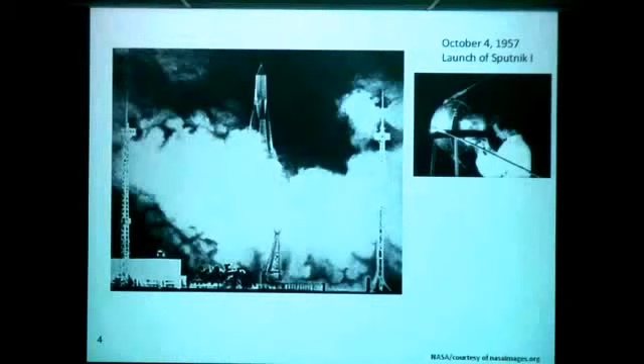Now, on November 3rd, 1957, the Soviets further rubbed our noses in it by launching Sputnik 2, carrying a dog named Laika, who died in space. Of course, animal rights advocates around the world were outraged, so nothing has changed on that score either.

In any event, it was time for an American reply. And on December 6, 1957, Vanguard TV-3 rose 4 feet into the air before falling back on the launch pad and exploding. This was America's answer to the Sputniks.

It was carrying a 3-pound satellite compared to the 184-pound Sputnik 1 and 1,120-pound Sputnik 2. The reason for the vast discrepancy in weight was that Soviet nuclear warheads were significantly heavier than their more advanced American counterparts, so the Soviets needed to build more powerful boosters than the Americans to deliver the warheads.

A few days after the Vanguard failure, the Soviet delegate to the United Nations asked whether the United States was interested in receiving aid earmarked for underdeveloped countries.

Not surprisingly, von Braun soon was given explicit orders to launch his satellite as quickly as possible. Medaris agreed with William Pickering of the Jet Propulsion Laboratory that JPL, rather than von Braun's team, should do the satellite work.

Now here's the successful launch of Explorer I. On January 31st, 1958, Explorer I was successfully launched atop a Jupiter C rocket.

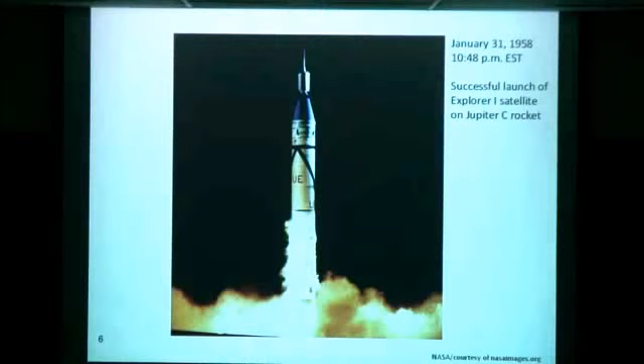All right, now here's what it looks like. This is the satellite. It's a little bit taller than I am. I'm 6'6", and this is almost 6'9", but it only weighed a little under 31 pounds.

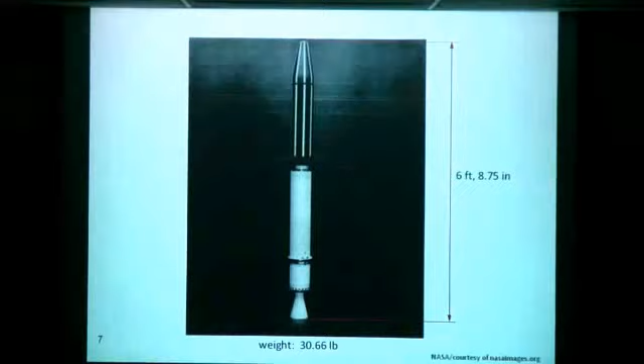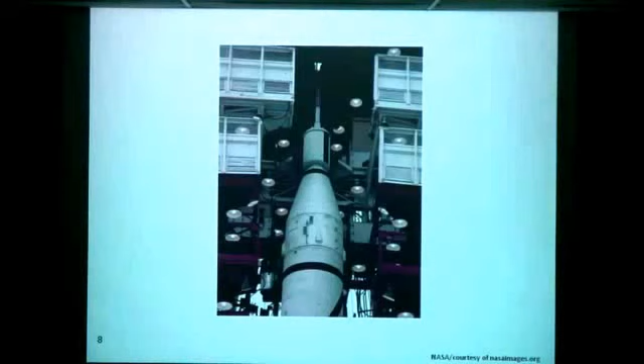It was mounted on a drum on top of the booster. Here's the Jupiter C, and it was mounted on this drum, which was spun up on the launch pad. So here's that satellite you saw, and this drum was spun, and it looked like this on the launch pad.

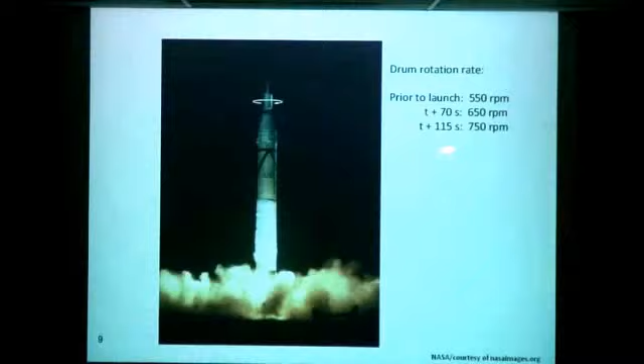Prior to launch, they spun the drum up at 550 RPM. At 70 seconds after liftoff, they increased the rotation rate to 650 RPM, and at 115 seconds after launch, up to 750 RPM.

So here's what it looks like. It came off the booster horizontally, and a little bit later, it was doing that.

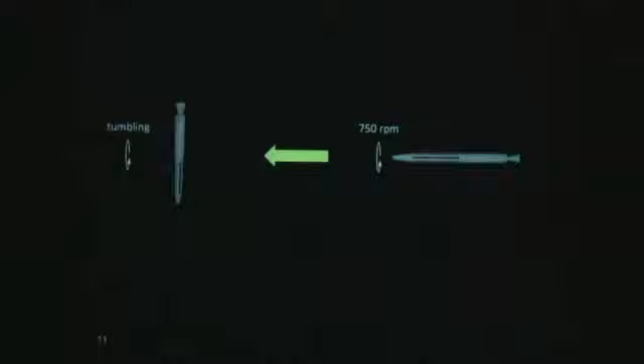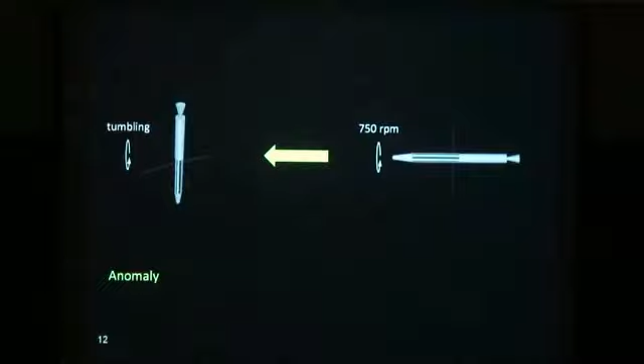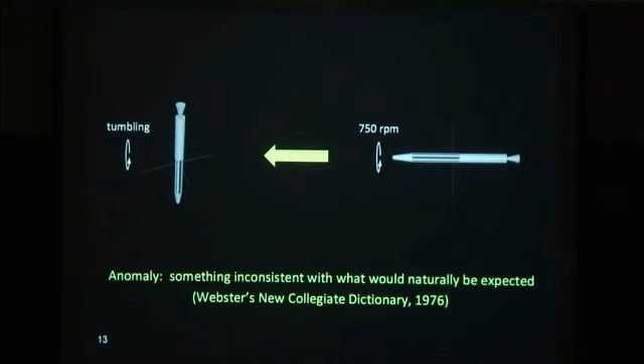Now, this was regarded as an anomaly. In order to ask why it was regarded as an anomaly, you have to know what an anomaly is: something inconsistent with what would naturally be expected. So the question is, why would something else be expected? We'll get into that, but this is what was going on in the engineering world, and I will come back to this in a minute. What was going on in the scientific world is something else.

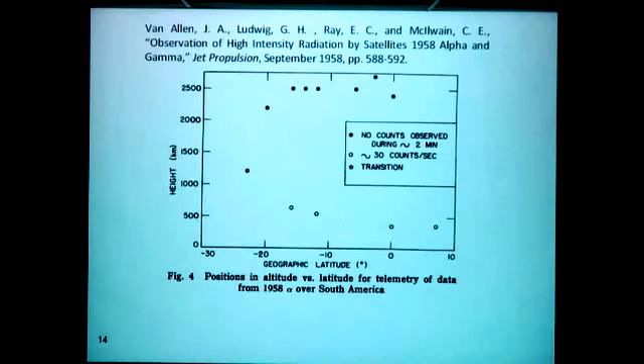So what was going on here? We found a spot in space where there's absolutely no radiation at all. Now, that was impossible—there's radiation everywhere in space.

What they discovered later, after looking at the data, was that the extremely low output rate is caused by very intense radiation, which jams the Geiger tube so that it puts out pulses of such low height that they are below the threshold of the counting circuits. Laboratory tests showed that this first happens for the present equipment when the radiation reaches an intensity that the counter would produce 35,000 counts per second.

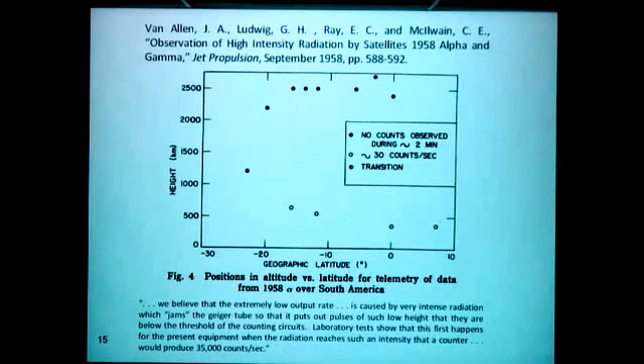So in the laboratory, they showed that not only were there no counts here, but there was 1,000 times as much radiation as here. And so this is the discovery of the Van Allen radiation belt. The historical fact is that the equipment read that there was no radiation whatsoever, and that's what gave them the data that let them realize this was actually a radiation belt, not a radiation hole.

So here's a picture of the mission that was declared a success because it succeeded in two things: it made it into orbit, and it discovered the Van Allen radiation belt. Scientifically, it was a complete success.

Now, this is William Pickering, who is head of the Jet Propulsion Laboratory. And here's James Van Allen, who is a physics professor at the University of Iowa, who designed the radiation detector, after whom the Van Allen belts are named. And this is Wernher von Braun, who is Wernher von Braun.

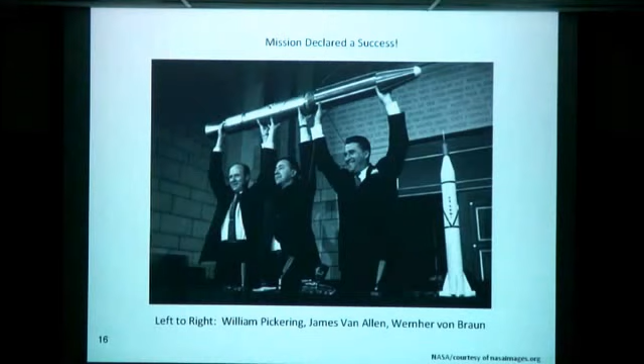Now, back in the engineering world, that's the science world. Let's get back to the engineering world. We still don't know what caused this anomaly.

There's this big question. Now, to answer this question, we need to go back 200 years to Leonhard Euler, who is the father of rigid body dynamics. Some of you have heard the name Euler, but I'm going to give you some background on him. Leonhard Euler is considered to be one of the 4 greatest mathematicians in history, the other 3 being Archimedes, Newton, and Gauss.

Euler lived to be 76 years old and created enough mathematics to fill 74 large volumes consisting of 866 items, including papers, books, elementary textbooks, books for the non-scientist, and technical manuals. And this does not include the projected 15 volumes of correspondence and notebooks that are still being compiled after more than 200 years.

Euler published more pages of mathematics than any other mathematician, and he possessed a trait that is rare among most mathematicians: he wrote clearly so that his work was understandable, which added greatly to his fame, because all of that stuff he published, people could absorb.

Euler made contributions to calculus, analysis, number theory, complex analysis, calculus of variations, differential equations, probability theory, topology, optics, electricity and magnetism, hydrodynamics, astronomy, and mechanics.

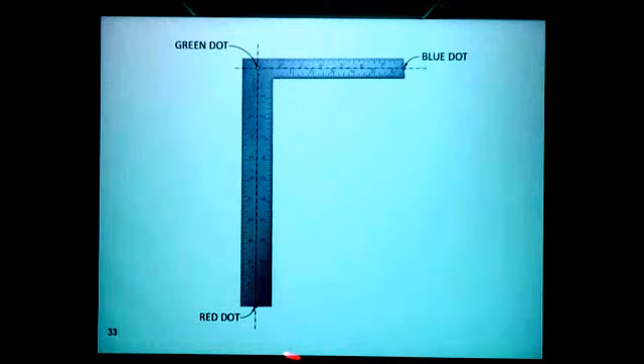If you draw lines down the middle of these two legs, there's a red dot here, a green dot here, and a blue dot here. And this is all taking place in a vertical plane where this resides.

What I want to do is launch this in the plane at an angle of 20 degrees to the horizontal, make this point start off at 20 feet per second, and give it an angular speed of 20 radians per second. You might think there must be something special about the number 20. Actually there isn't—I was just trying to find numbers that would keep this thing on the screen when I animated it, and that's what they were. So we're going to do that.

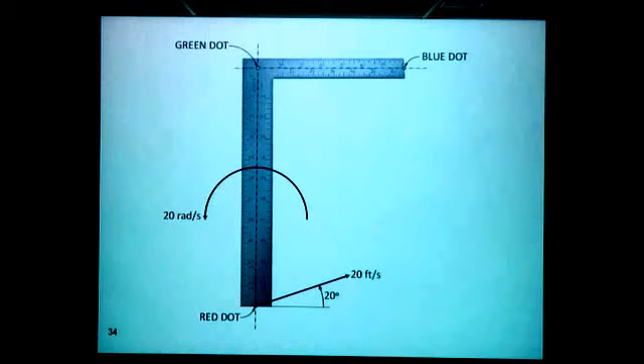And if you launch it, this is what it looks like. The red dot follows this trajectory, the green dot follows that, and the blue follows that. So that's what that looks like.

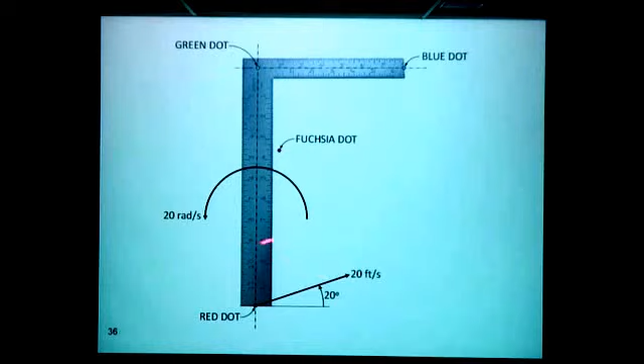Now I'm going to add another dot, a fuchsia dot. There's the fuchsia dot, and this dot is rigidly attached to this. It doesn't touch it, but think of some invisible piece of plastic that holds it there. And now we're going to launch this again.

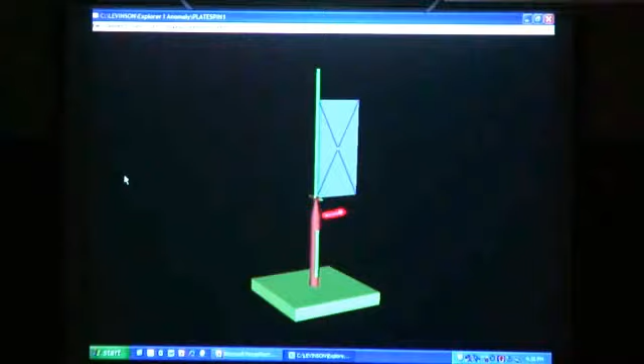And this is it. Now, what you're looking at is a rectangular plate with some X's on it so you can find the center. It's clamped between two halves of this green rod along the edge here, and the whole thing is on a revolute joint that is horizontal. So the plate can rotate, it's free to rotate. But it's resisted by a torsional spring that exactly balances the moment caused by the weight acting down through the center of mass, so it sticks straight up in the air.

Now there's a motor down here that will cause this to rotate about the vertical. So if I turn on the motor, what do you think will happen? This will start to spin, and what will the plate do? The plate should rotate out because you get a centrifugal force acting through the mass center. So we'll see what it does.

Start it up. Again, you're looking at differential equations being solved. I have a little red line in space that I just put there so you can see that there is a cone angle. So we'll let it spin around and then come to a stop.

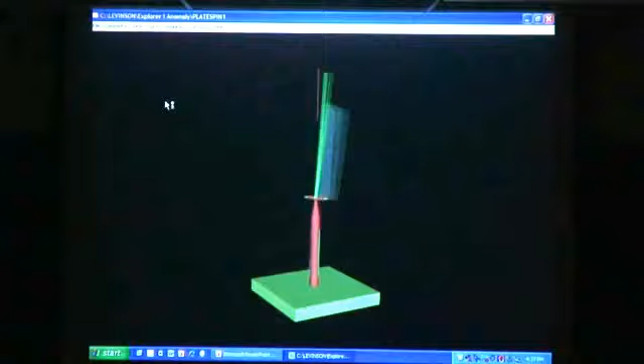So as it slows down, you should see it straighten up again as the spring takes over and pulls it back.

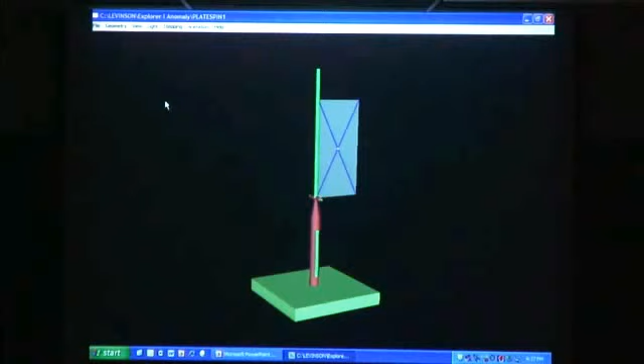All right, now this time I've clamped it along one of the diagonals so that the mass center is on the vertical axis. When I start this rotating, what do you think will happen? Any guesses? All right, let's see.

So even though there's no centrifugal force initially on the mass center, something's going on that makes this thing want to rotate out about the horizontal revolute joint. So there's something complicated going on here, right? We'll let that one slow down and stop. Then I'll show you another one.

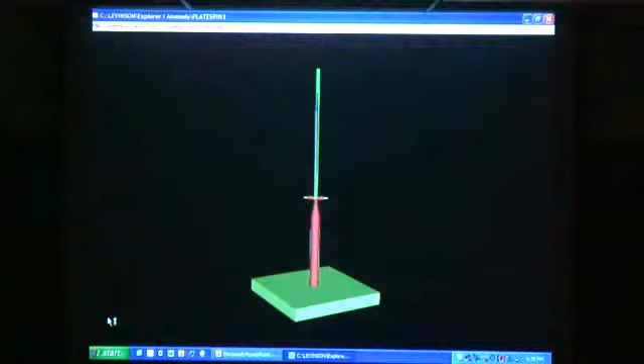All right, now I've got it clamped along some arbitrary line on the plate, so the mass center is sticking out and everything looks kind of arbitrary. Now if I spin this, what do you think will happen? Let's have a look.

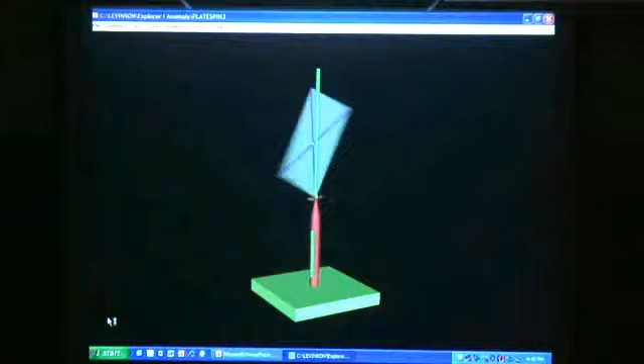The plate doesn't rotate, so something very interesting is going on. It turns out this is not some arbitrary line. What is it? Anybody know? It's a principal axis - but for what point? It's not for the mass center. The principal axes for the mass center are parallel to the edges of the plate and perpendicular to the plate. This is a principal axis of inertia for the corner.

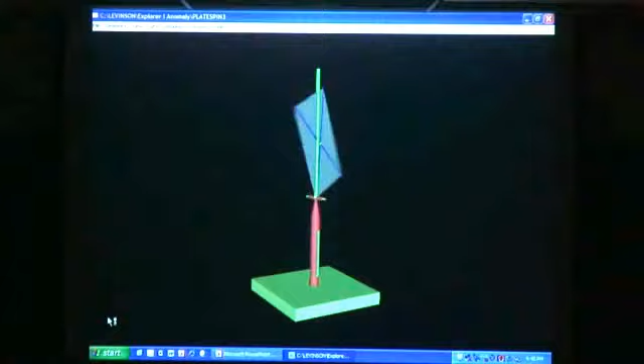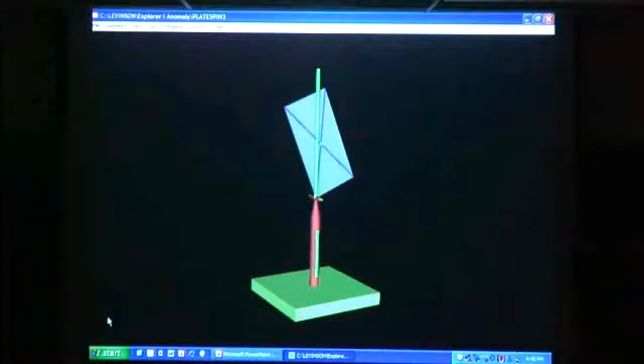So the fact is, a lot of people think the only points that have principal axes are mass centers, but there are two things here: every point in the body, and also every point in space, has a set of principal axes for this plate, and they have physical significance. This really does mean something. Now I'm going to show you another animation.

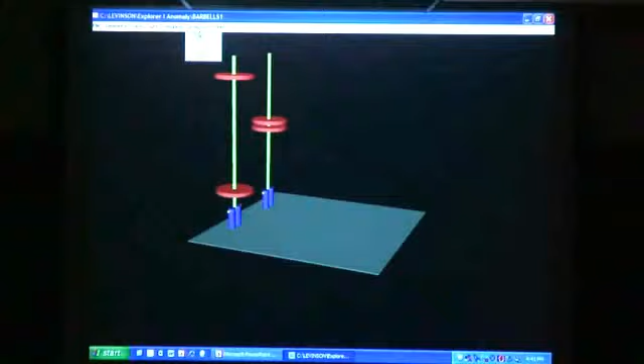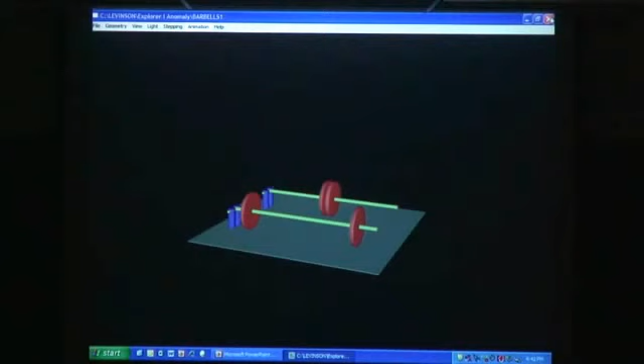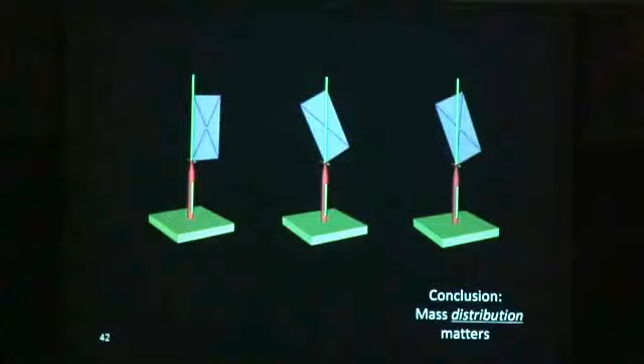Okay, so there was a big difference. So the conclusion from these was that mass distribution matters, and the conclusion from this was mass distribution matters.

That's the end of my digression. Now we're going to get back to Euler.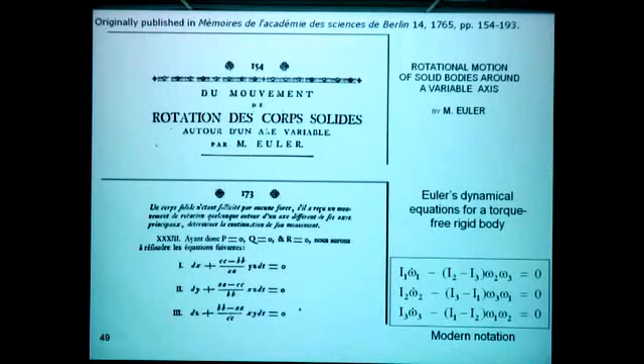So moments of inertia can always be expressed as the mass of the body times the radius of gyration squared. And since there are no torques on the right-hand side, you can divide through by mass and replace each of these moments of inertia by a square of a radius of gyration. So these are exactly the same equations that Euler wrote, that we today call Euler's equations.

Now I'm going to do a stability analysis. If we spin this body, let's say about this axis, what can we learn about stability? So here are the same three equations we had before, and these L's are the principal axes of inertia of body B for the mass center BO.

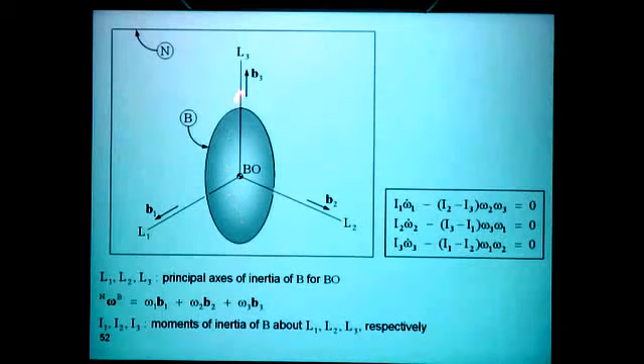The angular velocity of B in reference frame N can always be expressed in terms of unit vectors parallel to the central principal axes of inertia, and these I's are the moments of inertia of the body about those lines. Now here we have Euler's dynamical equations, and we want to study an exact solution, namely a spin of constant rate about the third axis. You can see this satisfies the equations identically - if you put omega 1 and omega 2 equal to 0 in here, this drops out.

There's an omega 1 dot, and 0 dot is 0, so that goes, this goes. Now S is a constant, and when you differentiate it, you get a 0. And here you get two zeros, so you even have twice as much zero-ness as you need to make that 0. So this really is an exact solution of those equations.

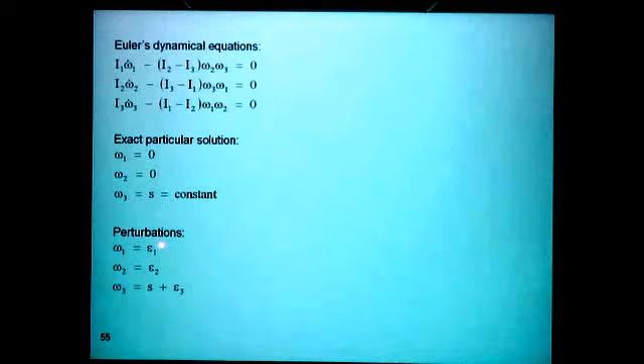Now we're going to add some perturbations. We're going to say omega 1 equals 0 plus a perturbation epsilon 1, omega 2 is 0 plus epsilon 2, and omega 3 is S plus epsilon 3. We substitute back in here and linearize in the perturbations, so we get that. Now the third equation isn't very interesting — we just get that the third perturbation just stays at its initial value. But there's more to do here.

If we assume, well first we can put this in matrix form, these two equations in matrix form, and then assume a solution of the form e to the lambda t — you've all done that in math class. You get a characteristic equation where you get the determinant of lambda times the 2 by 2 identity matrix minus this equals 0. That leads to a characteristic equation, and we can solve that for lambda by taking square roots. Now, we know we have an unstable solution when lambda is real, because one of the roots is positive, and e to the lambda t just keeps getting bigger as t gets bigger.

So what makes it real? It makes it real when the quantities in parentheses have the same sign. When does that occur? Well, when they're both positive or they're both negative. So if this is positive and this is positive, then I2 must be greater than I3, and I3 must be greater than I1 — so I3 is in the middle. Or they're both negative, in which case I2 is less than I3, and I3 is less than I1, and again I3 is in the middle. So when it's in an intermediate, the axis of intermediate inertia we're spinning about, we would expect the motion to be unstable.

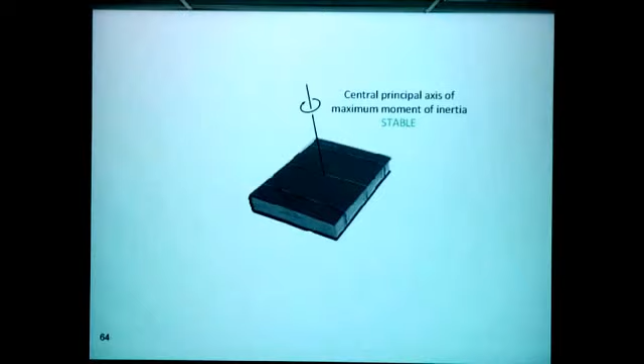Now here's a book, and I can flip this book around these three different axes, and here's what I would expect to see: that the central principal axis of maximum moment of inertia is stable, the minimum is stable, but the intermediate one is unstable. So we would expect to see that, and it just so happens I have a book here, and I can show you. Here, this is the maximum axis, and if I spin it like that — I better not break my computer.

You can see as I do that, it's very happy. Doesn't object, no matter how much of a perturbation I give it. And this is the minimum axis spin, and it likes that. But if I try the intermediate one, unless I do it perfectly — did you see it twist? See, try doing that someday. You can't not make it twist. So the math says this is what I should expect, and that's what really happens.

Okay, so now we'll get back to the satellites. So here we have this satellite coming off the booster, and it's a minimum axis spin, right? It's an axis of minimum moment of inertia. It should be stable according to Euler's equations. But remember, it did that. So we have ourselves a problem. Why did it do that?

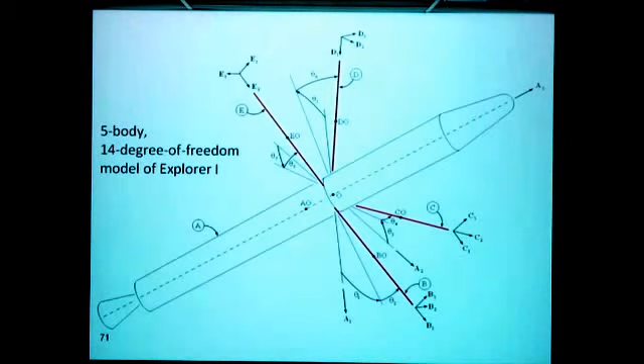I decided, since you've never seen a modern analysis for this, to do one. I wrote the equations of motion of a 5-body model of this, having 14 degrees of freedom. The degrees of freedom are this: a point in the rigid body, such as the mass center, has 3 translational degrees of freedom in space. The rigid body has 3 rotational degrees of freedom. And I included in my model the 4 antennas, but I modeled them as rigid bodies that have azimuth and elevation gimbals, because they're much easier to model than continua. So each one of these has 2 degrees of freedom, and it adds up to 14.

So now what I'm going to do is show you an animation of this. Let me find the right file. There, yep, I'm all set here.

All right, now remember, this thing's coming off the booster at 750 RPM, which I input. I had to estimate the mass of the antennas. I made each one of them 100th of the mass of the main body, which was only 30 pounds. And I took a guess on the damping constant.

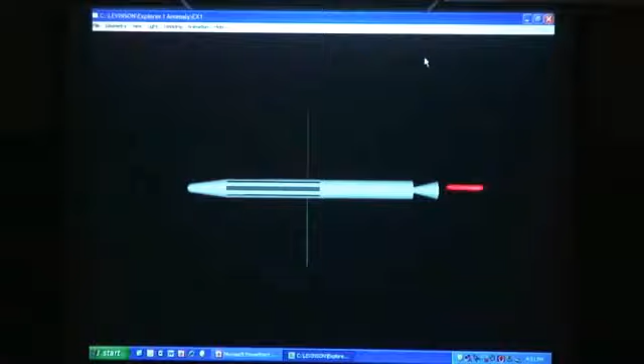So I have a spring, a rotational spring, and a rotational dashpot resisting motion of these relative to the body. And I gave it a perturbation of 0.001 radians per second along one of the transverse axes, which is 1/78,540th of the spin rate. So the perturbation is about 1/80,000th of the spin rate. So here we...

Watch what happens. Those little perturbations start to build up.

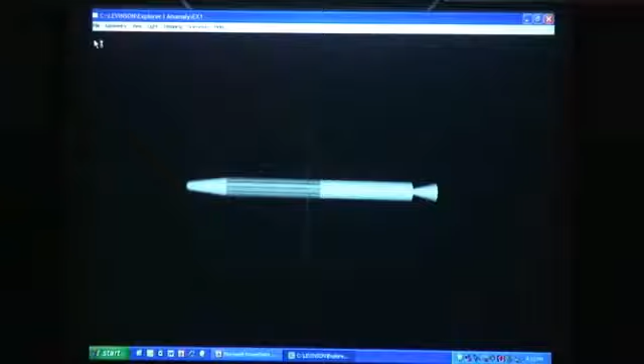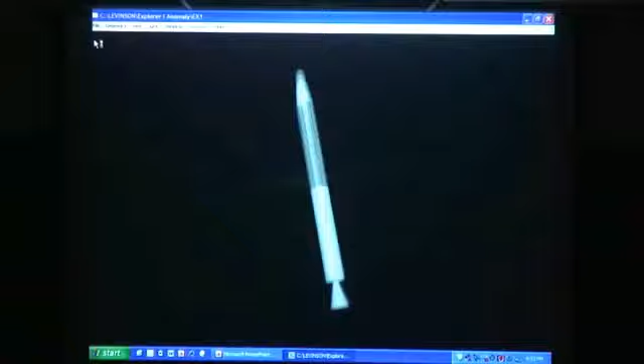Now you're going to see some aliasing. If you've seen a car going down the street where all of a sudden the wheels look like they were going the other direction, you'll see some of that. It has to do with the frame rate. Don't mind that—this thing isn't really stopping, it just looks a little funny because of the frame rate versus how many frames per output lines, what the time step is on the simulation.

How much time did it take? Oh, this took I don't know, a few minutes, five minutes or something. I don't have that at my fingertips, but it isn't very long. It's not like an orbit or something.

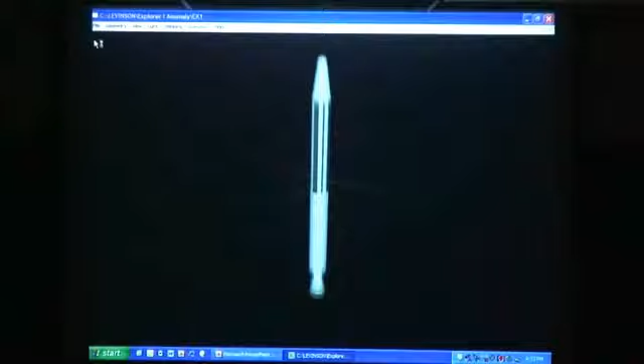So that's what they observed. You can see that's what happened. So what's going on here? Wait till it should stop any second now. I can kill it.

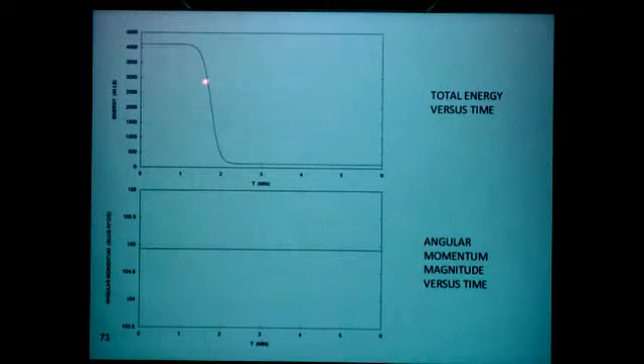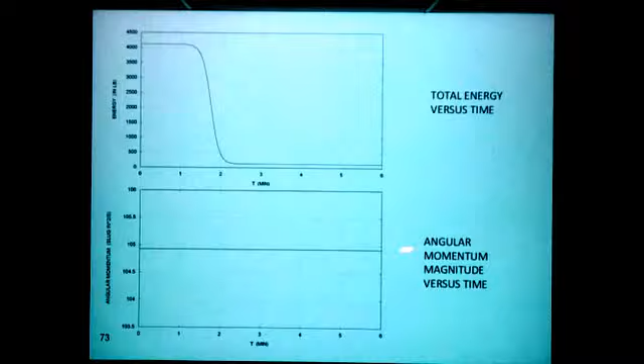Now, if I—what happened to my—oh, there it is. If we look at the energy versus time, you can see that it starts off with quite a bit of energy with that high spin rate, and then the energy losses through the boom motion cause some damping, and then it starts to tumble and they don't move anymore very much. There's angular momentum as a constant the whole time because there are no external torques. So you have this huge energy loss while nature is forcing the angular momentum to be conserved, and so it has to change what it's doing.

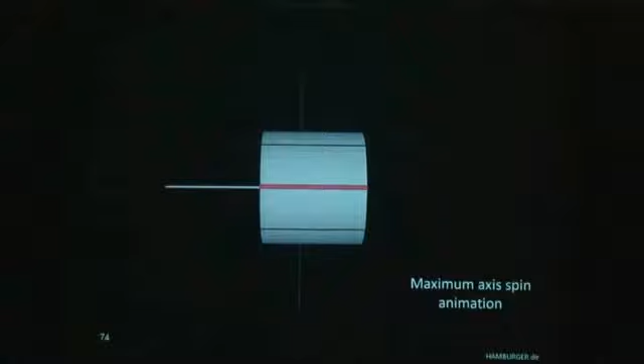Now, what I decided to do is to see what happens if you fatten up the spacecraft. So what I did here was say, let's make it really stable, a maximum axis, and see what a stable motion looks like. I made it fat like a hamburger, so I called it hamburger.

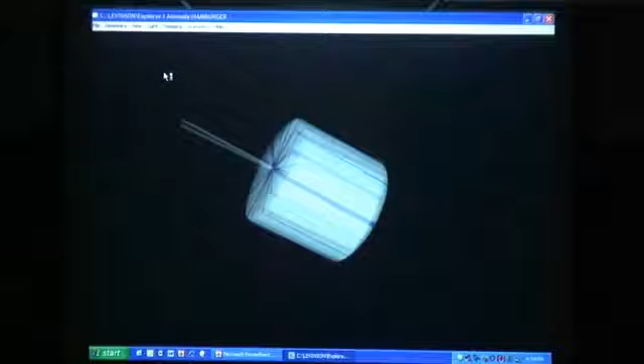Now it came off the booster at 750 RPM, and I gave it a transverse perturbation of half of that, 375—not 1/80,000th, but 375, a huge perturbation, unlike the other one. We'll see what energy dissipation does when we have a maximum axis spin. Now, this is just barely maximum—not something that's really maximum, just slightly maximum, almost a sphere.

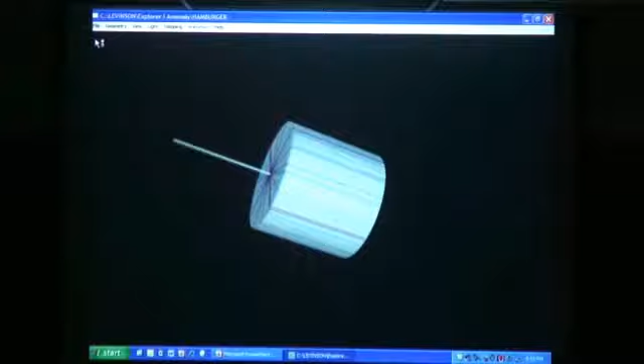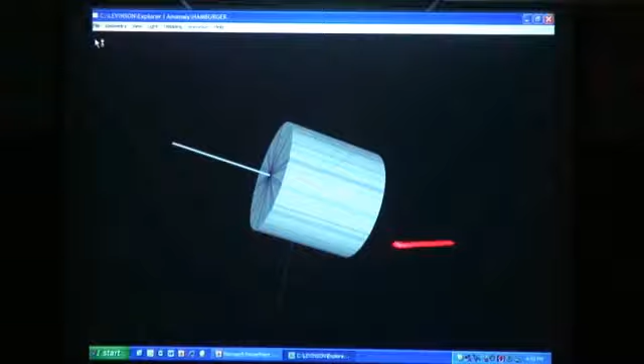So what you see from this is that whether or not we're doing a maximum or a minimum axis spin really matters when you have energy dissipation. When you don't have these booms, there's no energy dissipation, so both the minimum and the maximum axis spins are stable. When you have energy dissipation, the maximum axis stabilizes from this huge perturbation, whereas the minimum axis spin destabilizes from a tiny perturbation. So that is what happens there.

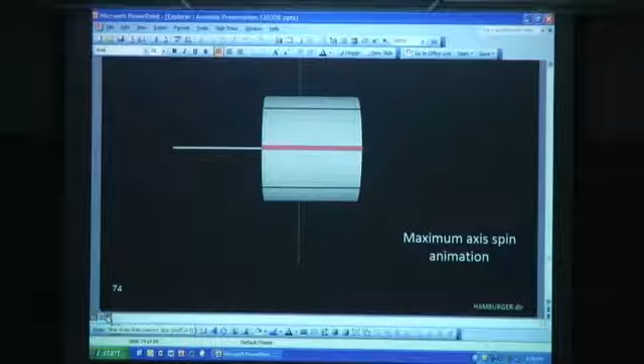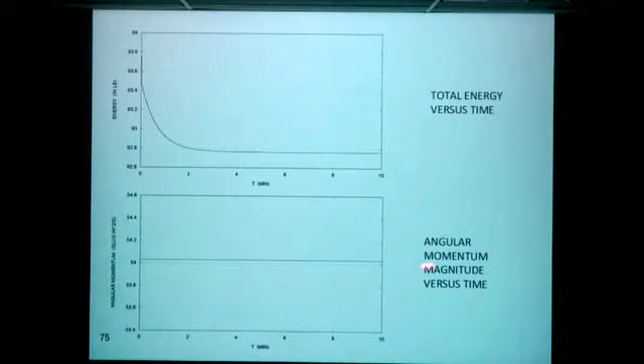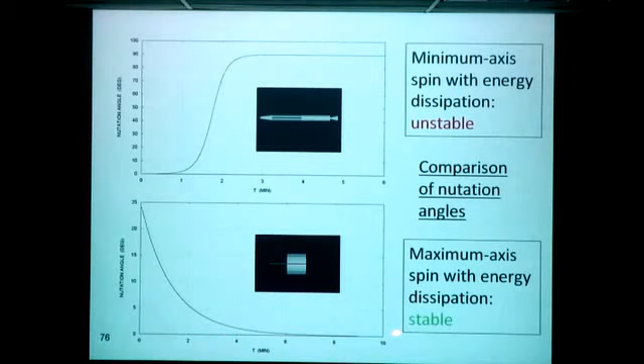Here's the energy and angular momentum again. So here again we have this huge decrease in energy, and again angular momentum is conserved. But if you look at the nutation angle—the angle between a line fixed in space and a line fixed in the spacecraft—the first one came off the booster with no perturbation at all, and ended up at 90 degrees, flipped over. The fat one, I gave it a huge perturbation: it starts off with a 24-degree misalignment and ends up back at 0. So you can see that qualitatively they're quite different.

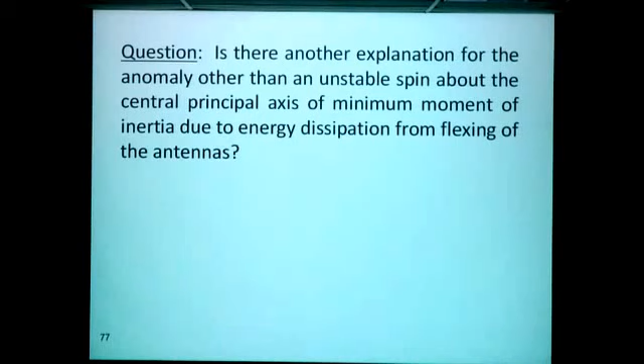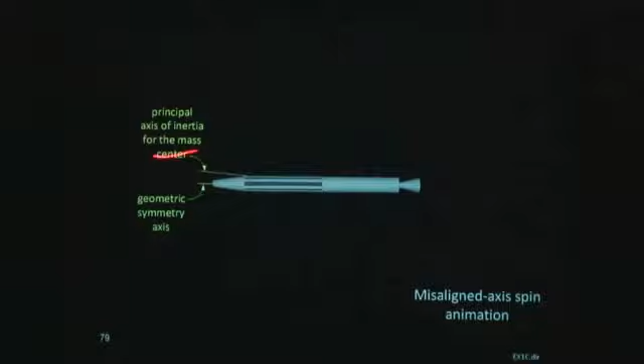Now, is there any other explanation for this? Can something else be responsible besides this flexing of the antennas? What about a misaligned principal axis for the mass center? If the geometric symmetry axis and the principal axis for the mass center are not the same line, and you start this off spinning about the geometric axis, what will happen? Well, I did a simulation of that—take a look.

There we go. And let's see what the name of that one is. It's C1C.

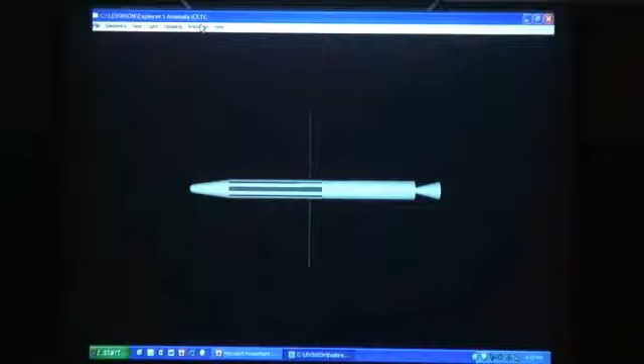Okay, now there's no energy dissipation at all. I've taken the damping out, but I'm starting this thing off spinning about a 1 degree misalignment. In other words, I started off spinning about the geometric symmetry axis, but the principal axis is misaligned 1 degree. So you can see it has the same sort of behavior, but there is a difference.

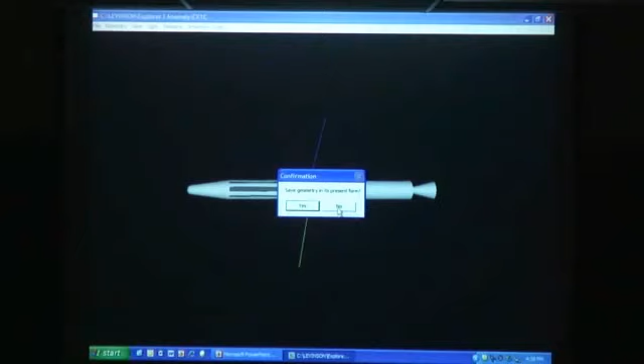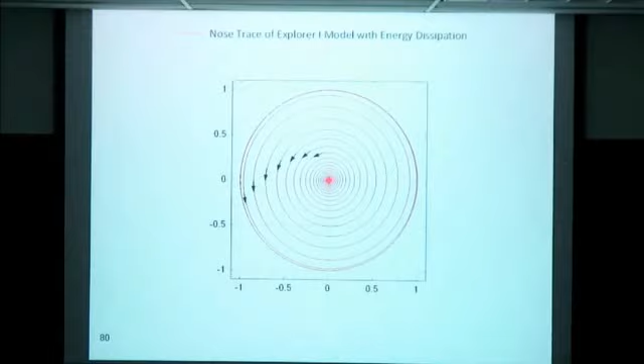You can see the difference if we look at the nose trace. Here's the nose trace of the Explorer I. It starts off here, and as time goes by, it kind of spirals out. This is a unit vector, so eventually it spirals out so that the vector is perpendicular to where it was, and you can see this is a unit circle here. So it spirals out slowly as that takes place.

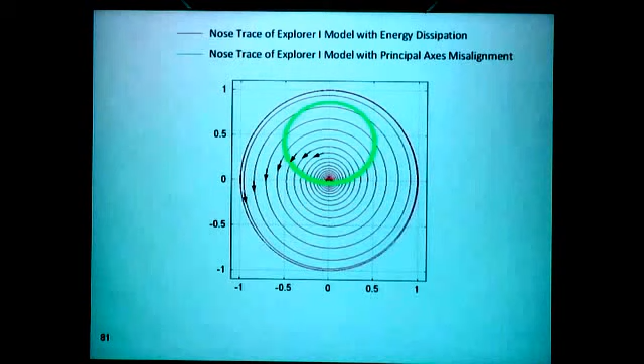Now, the one I just showed with the misaligned principal axis does that. There's no spiraling. It's a mess already from the get-go. You see, so it has a different qualitative behavior. So the question is, which one was it?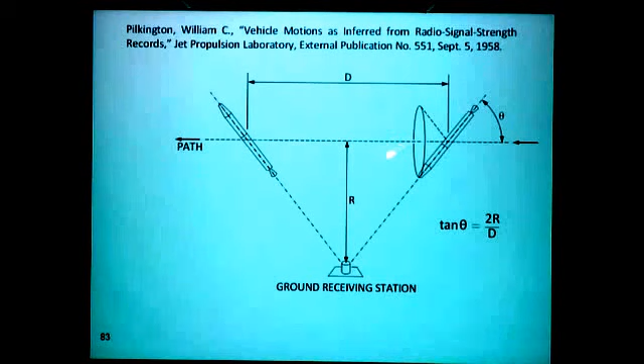Well, if you look at the way they calculated the attitude, when the nose of the vehicle was pointing at the ground station or the tail, they got a null. The data stopped coming in. So for a short period of time, you can think of the orbit path as a straight line. And from high school trigonometry, this distance from here to here is d over 2, and that's r. The tangent is rise over run, the rise is r, and the run is d over 2, and r divided by d over 2 gives you theta.

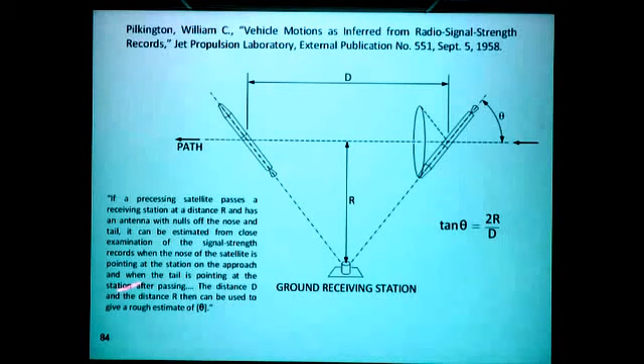They concluded that if a precessing satellite passes a receiving station at a distance r and has an antenna with nulls off the nose and tail, it can be estimated from close examination of the signal strength record when the nose is pointing at the station on approach and when the tail is pointing at the station after passing. The distance d and distance r can then be used to give a rough estimate of theta. They figured out that during the second orbital pass of Explorer I, a very slow periodic fluctuation in signal strength became noticeable, in addition to the flutter caused by the 750 RPM rotation rate. By the end of the first orbit, it was already evident that the 750 RPM axial rotation rate was being damped out. A slow precession soon transferred the rotation to an end-over-end tumble with a 9 RPM rate. So from that, they were able to figure out it was the antennas and not the misaligned axis.

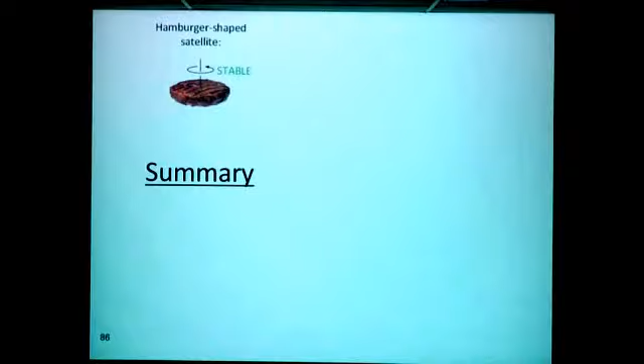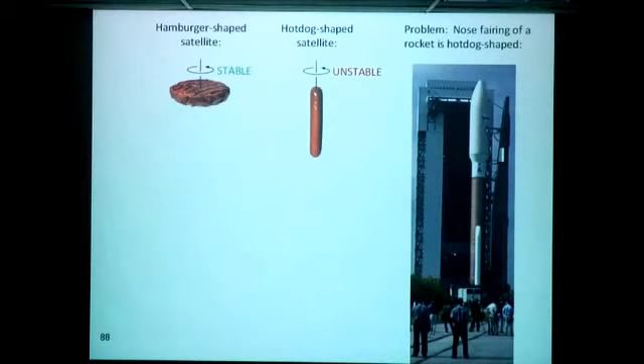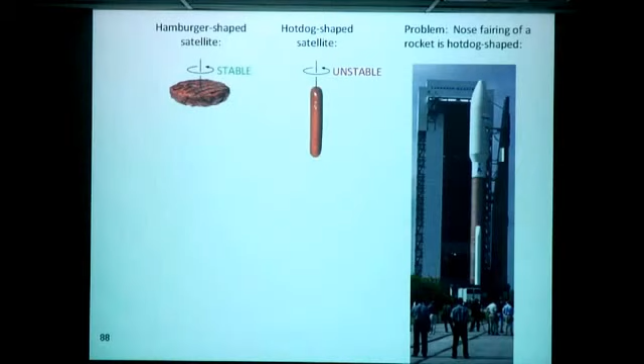So to summarize, we have a case where, since all spacecraft have energy dissipation, if you have a hamburger-shaped satellite, you're going to get a stable motion. But if you have a hot dog-shaped satellite, you don't. It's going to be unstable. But that presents a problem, because a nose fairing of a rocket is more amenable to housing a hot dog than a hamburger. Now, I know we're getting close, but if you give me another few minutes, I'd like to show you how this is resolved. Does anybody want to see that?

Okay, good. Now, there was a dual spin satellite concept that came up from the Hughes Aircraft Corporation. They said, what happens if we put a rotor on the hot dog-shaped satellite and spin it in the direction of the rotation of the satellite relative to space? Why in the same direction? Well, remember, angular momentum is conserved. So if the disk is rotating relative to the satellite in the same direction and angular momentum is conserved, the satellite has to rotate slower in the other direction to compensate, to conserve angular momentum.

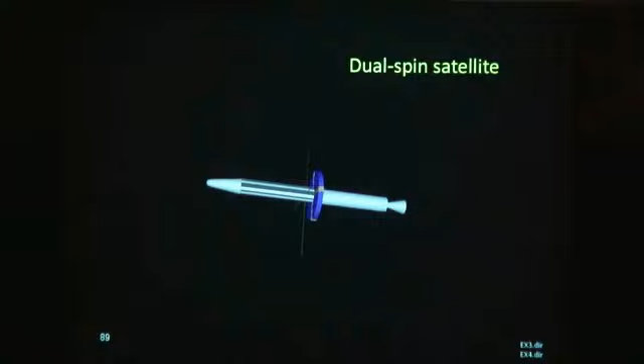So I'm going to show you an animation of this, and we'll pull up my trusty animation.

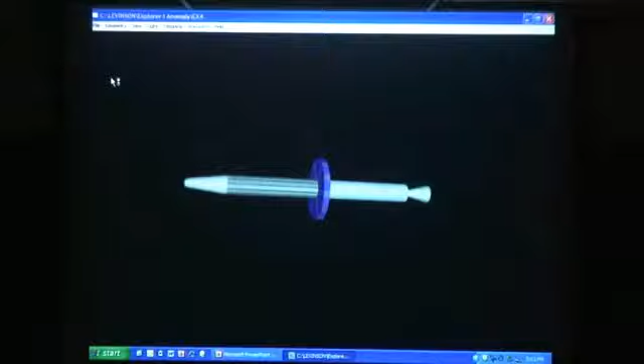Now, the very first thing I'm going to do, to show you that this is no gimmick, is run a case where the rotor is welded to the spacecraft. So we still have an unstable minimum axis spin. The disk is part of the spacecraft, it's not rotating relative to it. And it's back to the case with the energy dissipation and the beams, so you can see that we're back to the case we had before. By putting the rotor on there, I'm just showing you I didn't accidentally make it into a maximum axis spin. So it's wearing a tutu, and it's still doing the same thing. Without the rotor spinning, we still have the same problem.

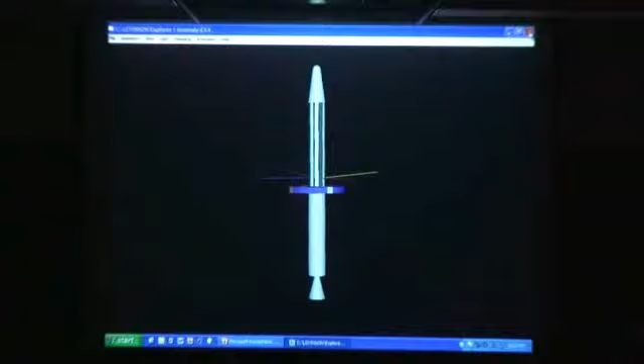But let's see, I want to kill that. Now I'm going to rotate the wheel in the same direction as the spacecraft as it comes off the booster.

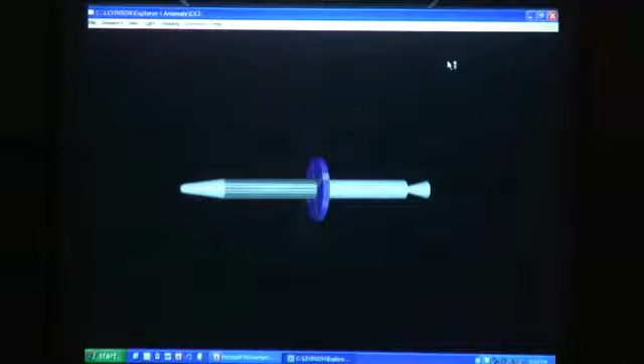And I've calculated what it would take to slow down the spacecraft so it's not rotating at all in space. There, so you can see with a little fine-tuning control system on there, you could get rid of the tumbling altogether. That was Hughes's solution: put rotors in spacecraft shaped like hot dogs, then put the hot dogs in the rocket nose fairing, and everything was happy.

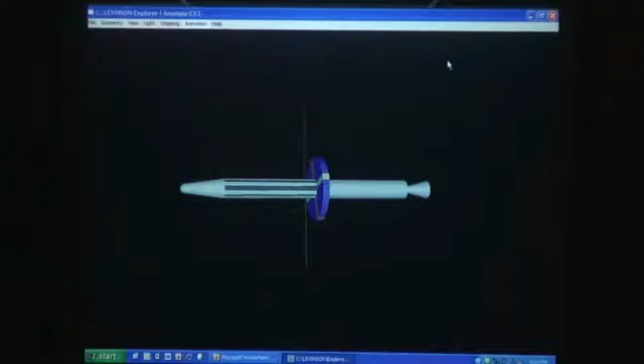Was that last simulation you showed with zero torque between the hot dog and the hamburger? No, there's a motor in there that spins the wheel up relative to it, but no active control once the spin gets going. Once it's up to speed, the torque just goes away, it's faster. I had to get it started, so I spun it up from nothing with no feedback, that's probably why it's wobbling.

It's an oversimple question, but why is spacecraft spinning at such high rates on their axes to begin with? Well, that one they thought would make sure it was nice and stable, and they were wrong. But there are a lot of reasons it's used for stability. Now we have things that can unfold, and you can make a hamburger out of them and spin them for stability, not at 750 RPM. There are lots of satellites with spinning rotors in them used in all kinds of different ways.

There are usually 4 of them, on the legs of a pyramid. There's something called a pseudo-inverse, where you take the 3 torque components you want and distribute them among the rates that these 4 wheels have. There's a whole theory of that, you can get into it in your spacecraft course here.